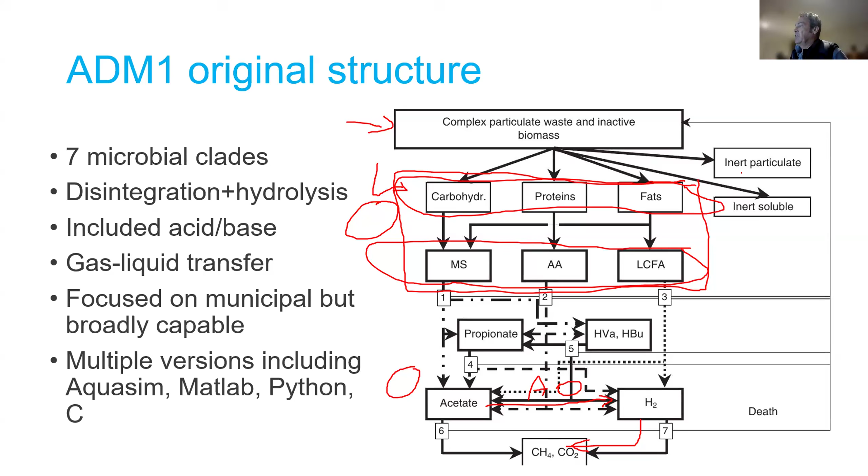Okay, so there's a couple of tricks with digester modeling in general. So you'll know, I'm just going to move this bar out of the way. Yep. So you've got pretty standard mass balances, dilute assumption in general in your soluble phase and your gas phase. So you've got your soluble components where you've got your standard mass balance equation with dilution and conversion.

The difference with activated sludge and anaerobic digestion in general is that you need a gas phase. So that gas phase is basically, it's a normally fixed volume. It can be variable volume. That's actually not really a problem either. So you can have an anaerobic sequencing batch reactor where your liquid phase is increasing, your gas phase is decreasing. That can be done, but under the standard implementation, you've got a fixed volume for your liquid phase and a fixed volume for your gas phase.

And that's a little bit tricky because you've got gas liquid transfer between the liquid phase and the gas phase. That can be bidirectional. So you can have gas going into liquid and liquid going into gas. And normally it will be from liquid to gas. So we'll have methane, CO2, and hydrogen transferring from the liquid to the gas phase. But some of the newer applications, for example, biomethanation, where we're injecting hydrogen into the gas phase, which then transfers to the liquid phase to make additional methane, that works perfectly well. We've still got the same equation, KLA times (C sat minus C), and it just works.

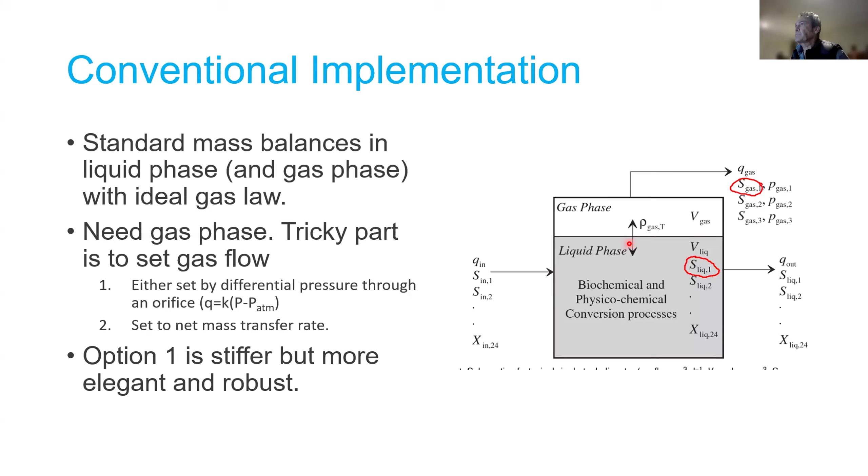So high rate anaerobic digesters treat mainly soluble feeds. They can be quite high strength, but the feed will mainly consist of sugars, soluble proteins, and maybe some soluble fats. So think things like brewery wastewater, beverage wastewater, ice cream manufacturing, something that is very low in solids but quite high strength. So you've got this granular sludge that forms.

Under this regime, you've got a very rapidly degradable feed that will produce VFAs very quickly if you let it. And you're really challenging your process stability rather than the process performance. So the hydrolysis doesn't even really happen. It often ferments before it even hits the digester.

Then you've got anaerobic membrane bioreactors. So that's simulated similar to aerobic MBRs, except we've got gas being recirced instead of aerobic scouring on the reactor. Anaerobic lagoons, just very long retention times with solids retention.

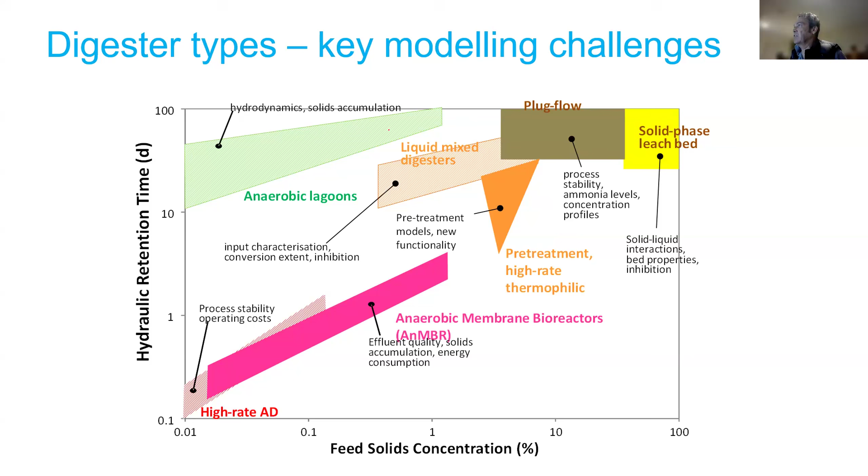And then we end up at the very high solids concentration with basically solid phase leach bed. That's where we've got a liquid flow through a leach bed, the liquid then being digested in a high rate anaerobic digester, and then the liquid flowing back through the leach bed. So that normally requires a 1D or 2D or even 3D model implementation. So there's modeling approaches to all of these, but of course we're mainly working with our municipal liquid phase digesters. So we're working in this region here, which may include pre-treatment.

Okay. So there's been a few key changes over the years, and particularly in the last 5 years it's been driven by municipal applications. So the changing needs in the digester space, as well as the changing modelling needs, as well as the change in technologies that have been applied to digester modelling.

The big change has been in plant-wide modelling, and Amir will talk about this a bit more as well. But plant-wide modelling was a big change because one of the things we really needed to do was to model P throughout the whole process, and that allowed things like nutrient recovery, implementation of technologies such as struvite and more recently vivianite to recover P. But to model P plant-wide, you need to also model iron and sulfur. To model iron and sulfur, you need a very good chemistry model, and that then led to the PCM1.

And in parallel, PCM1 didn't precursor this, but in parallel, there were some big updates to Sumo and BioWin to incorporate sulfur, phosphorus, iron chemistry, and the advanced iron chemistry needed to really model precipitation and a few other things. So this led to development of advanced chemistry models, which include a lot of non-ideal stuff like ion activity, ion pairing, its downstream impacts on gas-liquid transfer, full incorporation of temperature into that chemistry model, and a few other things.

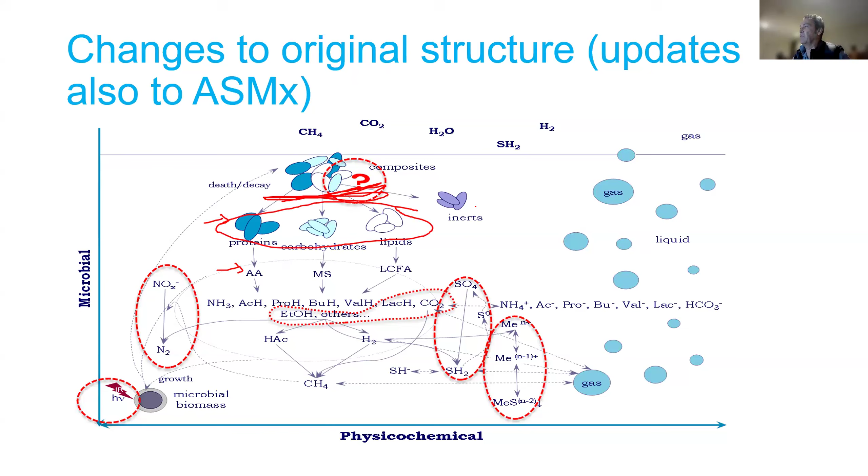Just showing you how it fits into a plant-wide context now. We can see we've got iron basically reducing in the primary clarifier. Sulfate will reduce as well. It'll probably already be reduced from the sewer.

You'll then go into your digester. Your iron phosphates will, because your iron will reduce again, release the phosphate. You'll also end up with poly P releasing, hydrolyzing over a longer time period. So that's actually a kinetic process. We've got iron reducing, sulfate reducing, sulfide binding with iron, phosphate forming calcium phosphate, and potentially iron phosphate if you've got a heap of iron around.

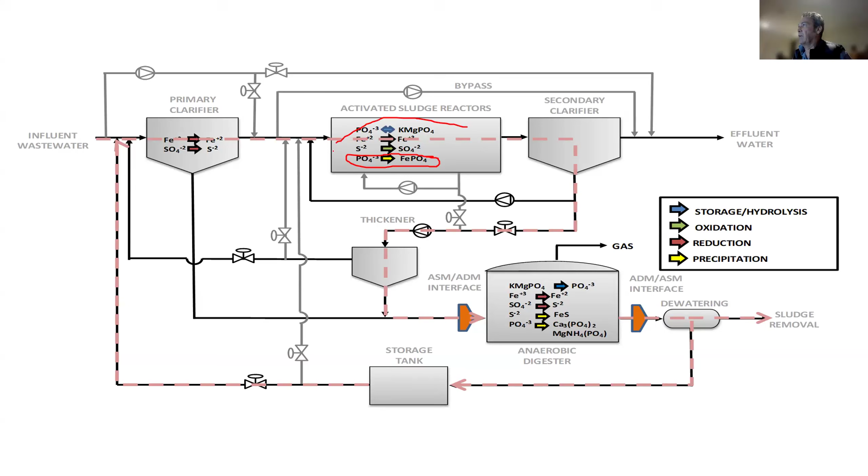And then you can do stuff like struvite precipitation or capture in the return stream to then try and recover phosphate. So inclusion of all these processes, and inclusion as well in the activated sludge modeling bit of these additional processes, is kind of essential to model P, which is essential to basically have a competent plant-wide model. So this is just showing this in a bit more detail. I'll probably skip over this because I am getting a little bit shorter on time and I want to show you some other stuff.

Okay, so this is the other area which has been difficult to communicate. I haven't ever published it, but I have talked about it a lot. And this is how practically I treat inputs now. As I said, I don't use the XC. Forget about that. I basically take everything and I separate WAS and primary into two different streams. And these then, I'm actually going to use my pointer.

These get separated in two streams, and each of these streams then gets split into carbohydrates, proteins, lipids, and inerts. So these are our four main components in any particulate stream. So they get separated into those four main components. Now, the protein content is set by the nitrogen content in the stream. And as I said, we've got one of these for WAS and one for primary.

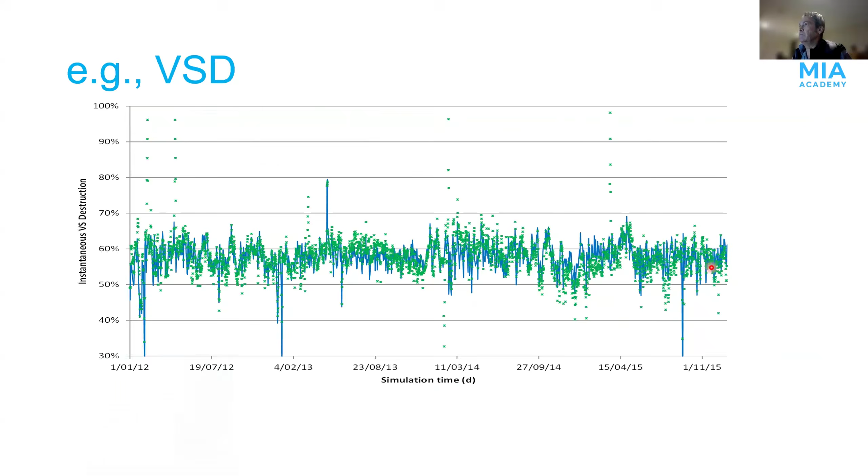Okay. So the last thing I just wanted to talk about is version creep. So we've been around for 25 odd years, so there's been a bit of version creep. Now, the most definitive versions are probably the MATLAB and/or C version. So we've got a MATLAB C core model, if you like, a model that hasn't been messed with, and then we've got the MATLAB C version with the iron, phosphorus, sulfur extensions and PCM1. So that's all available on Javi's GitHub.

There's a few Python versions, mostly very much stock. So they've just been made a stock version. The most commonly used one is probably PyADM1, which is also on GitHub, and there's a preprint article provided as well. The first version was actually Aquasim, but the Aquasim reference version still uses XC as a primary feed. There's all the versions that I've provided with my publications, also on GitHub. I don't have a GitHub site, but generally I'll publish a version with each publication.

But yeah, version creep and differences are a problem. And maybe that's something we have to do, is to just produce a definitive current version with the proper feed characterization and maybe a couple of reference examples. So that's a project for when I get a bit of time.

So finally, to finish off, most people who are in MIA, I'm guessing, want this as part of a plant-wide model, or want to model digesters. So sludge digesters, not all the other types of digesters I talked about. The BSM2 versions are generally consistent, both the complex version with iron, phosphorus, sulfur, and the non-complex version for simple digester modeling. I use the basic version for digester modeling unless you're trying to do plant-wide modeling. It's easier to interpret, a lot faster to use, etc. Sumo and BioWin implementations within the sludge world are broadly compatible with the BSM2 ADM1 with or without physicochemical extensions. Both Sumo and BioWin allow you to turn off the physicochemical extensions.

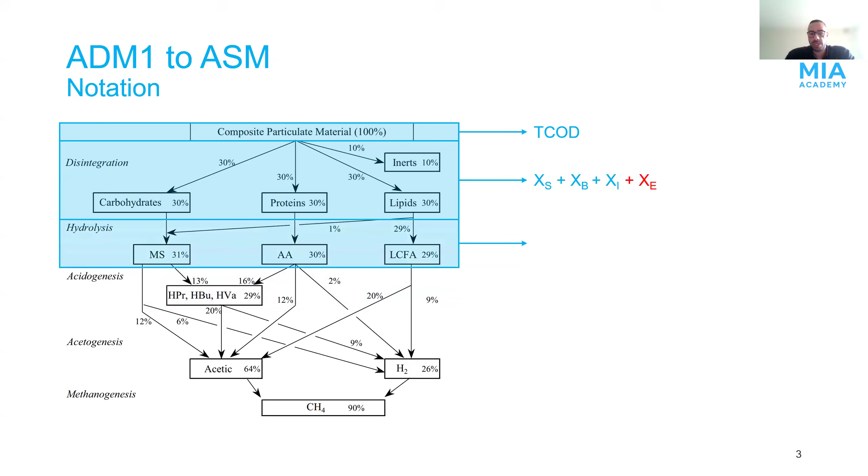They were both considered inert material, but now they have a distinction between XI, which is influent non-biodegradable material, and XE, which is endogenous products. And then hydrolysis here is basically everything hydrolyzing, which is only the biodegradable fraction being hydrolyzed, which becomes SS in some model notations, or SF as in the fermentable substrate in the notation of ASM1, and I think the rest of the ASMs.

And then here, in ASM notation, there's no differentiation between acidogenesis and acetogenesis. It's just combined into one process, which is fermentation. And this is where you start producing your VFAs and hydrogen. And in some models like BioWin, they don't just lump VFAs, they have propionate and acetate and also hydrogen production.

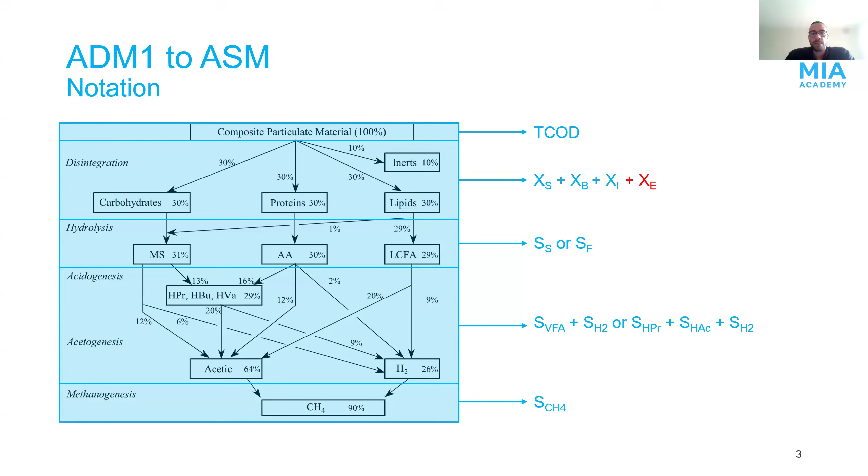And then your final process is basically producing methane, and it's just soluble here because you produce it as a dissolved gas, and then it gets stripped into the headspace. And this is what you end up with. You end up with a model where your total COD that goes to the digester is here. This disintegration is just basically fractionation.

So you have SI, which is the soluble non-biodegradable material. You have very little of that in your sludge feed, but since the model considers everything as completely mixed, you end up with some of it in the digester. You also have the XI, which is the inert non-biodegradable. It's just non-biodegradable COD, but that's the one that comes in the influent.

And XB is basically just your biomass, and you also have some of the biodegradable particulate material that is enmeshed into your biological floc. And with anaerobic decay of your biomass, if you look at the decay models, they have the death regeneration model. So whatever is intracellular material in your biomass becomes XS, and then you also have XE, which is your endogenous decay products. So this is about anywhere from 15 to 20% of your biomass, and the other fraction is just biodegradable material that will be utilized later in this cycle.

And then with hydrolysis, you end up with SF, which is a fermentable substrate, and then fermentation, you have VFAs, hydrogen, and also carbon dioxide being produced, and then you end up with methanogenesis. The explicit difference between ADM1 and ASMs is that we don't have the lipid, carbohydrate, and protein degraders. It's all carried out by ordinary heterotrophic organisms, which is not true, but it is how the model is structured.

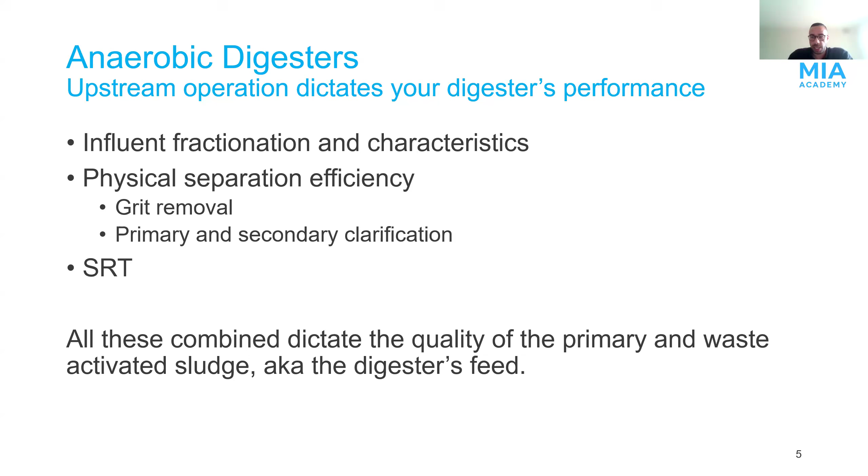Physical separation efficiency, your grit removal efficiency also impacts any downstream process and your digester, and also primary and secondary clarification. Also, the operational SRT impacts the digester's performance very much. Because all of these combined dictate the quality of your primary and waste activated sludge, aka your digester's feed.

All of this is going to be consumed anyway to produce more biomass. And then you have your VFAs that are also going to be consumed to produce biomass. Same thing with the biodegradable soluble substrate, and same thing with the colloidal substrate. So when these fractions are utilized, they end up producing more bacteria, which is your active biomass, which is XOHO, and you also, with decay, you end up accumulating XE.

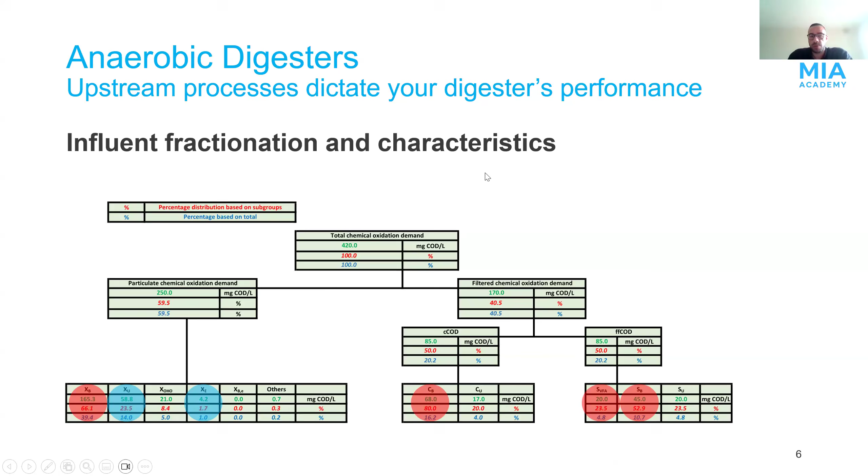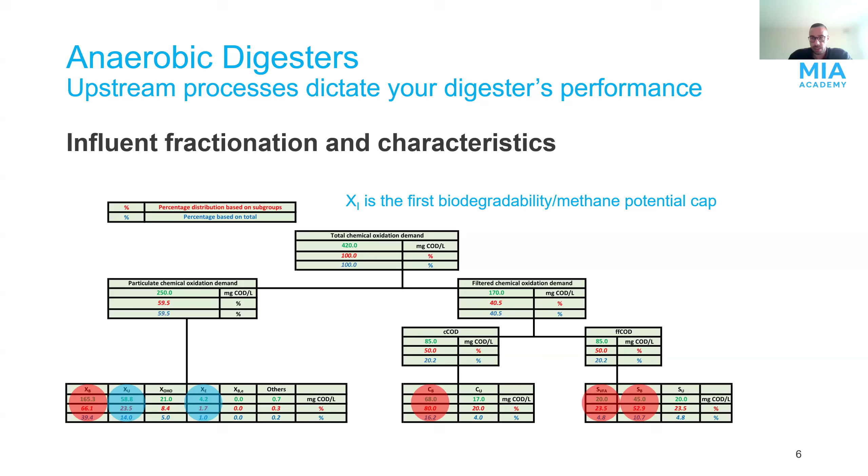So you end up with this fraction going from around 14% all the way up to 40%, depending on how your operation is. So the first thing that I call a biodegradability or a methane potential cap is XI. So if your sludge has a 20% non-biodegradable fraction, you cannot go beyond 80% biodegradability, basically. So that's your first limit when it comes to methane potential in your digester.

Second thing is primary clarification and secondary clarification. So primary clarifiers intercept COD before the aerobic tanks. So it captures all the solids, the good quality solids that can go into the digester before being oxidized and synthesized into biomass. The more you capture in the primary clarifier, the more methane potential is preserved, and it's basically the highest quality feedstock in the plant.

Also, grit removal has an impact on your digester because any grit that escapes could occupy active volume, and then you end up having short circuits, and your operational SRT decreases because you're occupying that space. So grit removal ensures healthy operation, although it's not modeled explicitly, but it's something that you want to consider when you're dealing with a plant-wide model.

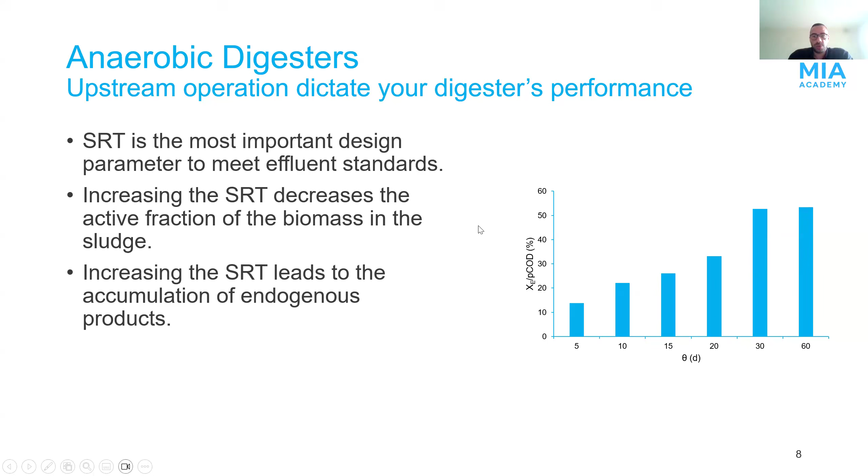So you're doing two things here. You're accumulating endogenous products, and you're reducing the active fraction of the biomass, which is most of your methane potential. So your second biodegradability or methane potential cap is XE. But there's a caveat with XE specifically, which is, are they actually inert? They are not. Endogenous products have been considered inert or non-biodegradable in most of the ASM notations before, and even in experimental studies, sometimes they have been considered non-biodegradable.

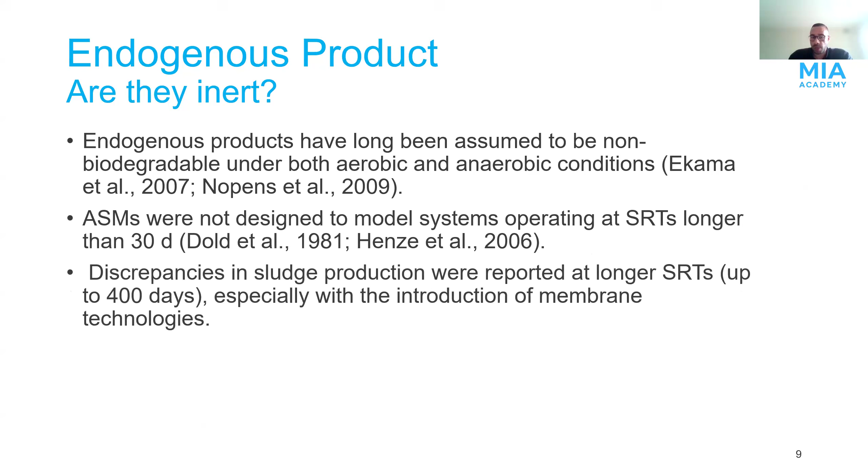But these models specifically were designed to model systems operating at SRTs no longer than 30 days. And with the introduction of membrane technologies and SRTs going all the way up to 400 days, they saw discrepancies in sludge production, which is the most important parameter you need to calibrate on when you're using any plant-wide model. They were always overestimating sludge production, which indicated there was a process that was missing. And that process was basically the degradation of endogenous products at longer SRTs.

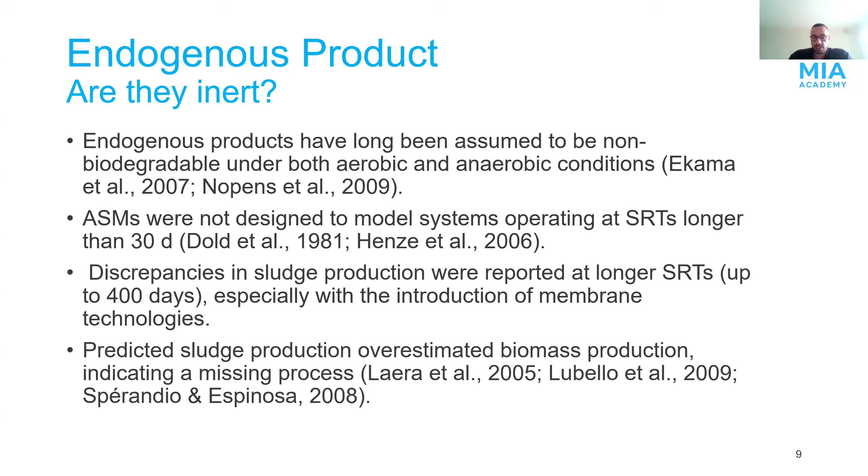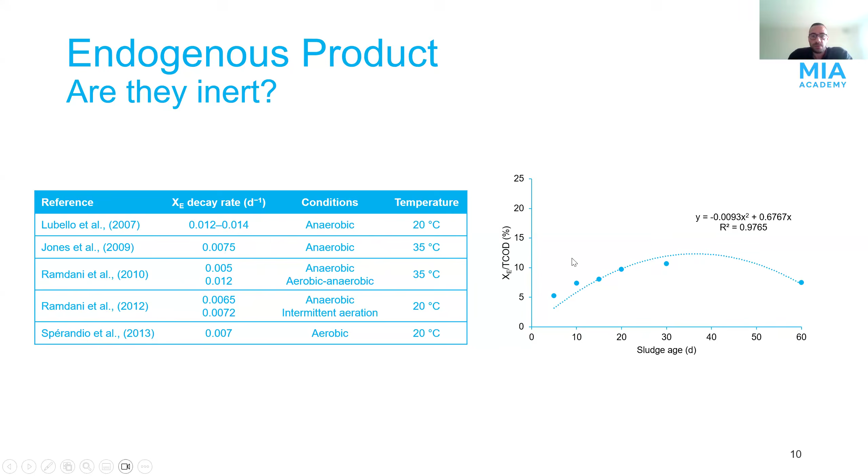The thing here is, it's kind of a summary. You look at XI and XE as the two caps on methane potential in conventional anaerobic digestion, because if your digester is operating at a longer SRT, you might see degradation of endogenous products in the digester also.

One thing is that reporting SRT is not a common practice in general. Especially in anaerobic digestion, you would not see any information about the upstream processes, especially SRT, although understanding upstream operation and influent characterization and fractionation is integral to making accurate predictions. You can actually figure it out on your own just by knowing the SRT.

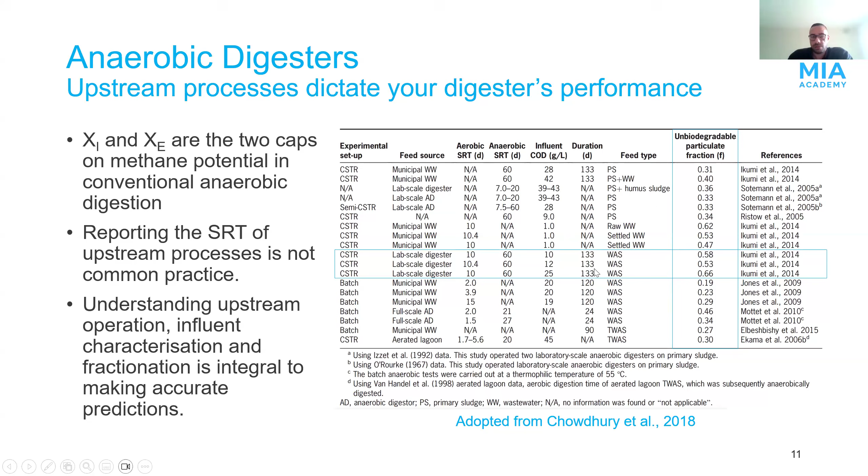You can already guess that the non-biodegradable fraction here is going to be high just because the SRT upstream is high. You have a 10-day aerobic SRT and an anaerobic SRT of 60 days, and you can figure out that it's going to be that high just by looking at these numbers. Although the unbiodegradable fraction here doesn't distinguish between the influent and XE, it's something you can guess by knowing the SRT of the system.

When it comes to good modeling practice of anaerobic digesters, AD mass balances are one of the easiest to close, because you just have a sludge feed, your biosolids coming out, and the gas coming out. The mass coming in is your flow multiplied by the total COD concentration. Same with your biosolids, flow multiplied by effluent COD, and the gas coming out is the difference between those multiplied by the stoichiometric conversion. The theoretical methane yield is 0.35 at STP, and you just do the temperature conversion. That's your mass balance.

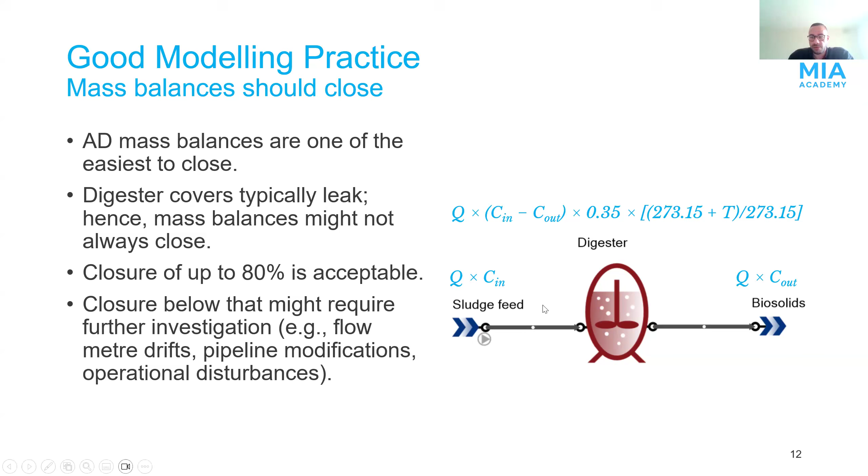But typically digester covers do leak, so the mass balance might not always close, but closure up to 80% is acceptable. I'm quoting Damien from a meeting we had 7 years ago. I don't know if this has changed, but closure below that might require further investigation. It could be flow meter drift, most of the time it is, pipeline modifications, or operational disturbances, but you need to check this before you start the modeling exercise.

The second thing is hydrolysis. There's a distinction between ASM and ADM1 here, because hydrolysis dictates the amount of volatile solids reduction or COD removal. Hydrolysis in ADM1 is first order, but hydrolysis in ASMs is surface limited, described by a Contois model, and also modulated by redox switches like the Monod equation. These are the three hydrolysis equations in ADM1: hydrolysis of carbohydrates, proteins, and lipids, each just a first order equation multiplied by a hydrolysis factor.

But in ASMs, it looks like this. You have the hydrolysis rate, but it's also dependent on the amount of ordinary heterotrophic organisms in the system. This is the Contois term. It's based on XB, your biodegradable particulate substrate, and it's dependent on OHOs, and this is your half saturation hydrolysis constant. Then the F redox here expands into this.

If you have an aerobic environment, this is the term that dictates what's happening; it's just a Monod term. In anoxic environments, you have these switches. If nitrite is the electron acceptor, this term works, and this inhibition function is what limits it when it comes to nitrate. So if nitrite exists, nitrate doesn't work, and the opposite.

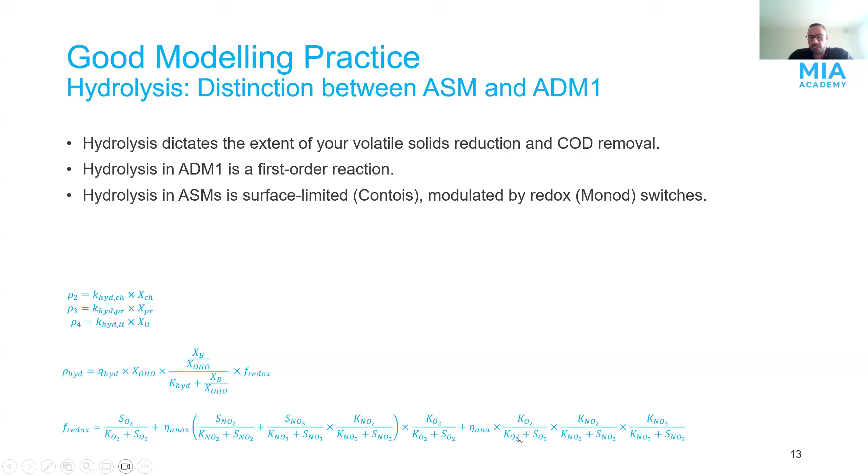All of this is also multiplied by a limiting function for oxygen, because if you have oxygen, you don't have an anoxic environment anymore. Same with anaerobic environments, but it's all just limiting factors because there's no explicit electron acceptor. It's mostly fermentative reactions where the electron donor is the electron acceptor. So once you have any of these, the environment is not anaerobic anymore. That's basically what it would look like in your model.

So you have rate of hydrolysis of slowly biodegradable substrate, rate of hydrolysis of substrate from biomass decay. So this is the differentiation between the biodegradable substrate that comes in the influent and whatever is produced from intracellular material. That's the distinction between those two. And then you have your reduction factor of anoxic hydrolysis, which is this term over here, and reduction factor of anaerobic hydrolysis, which is over here.

So hydrolysis is slower in anoxic and anaerobic environments typically, and it's the fastest in an aerobic environment, and it's reflected here in the model. There's no limiting function over here. It's just the Monod equation.

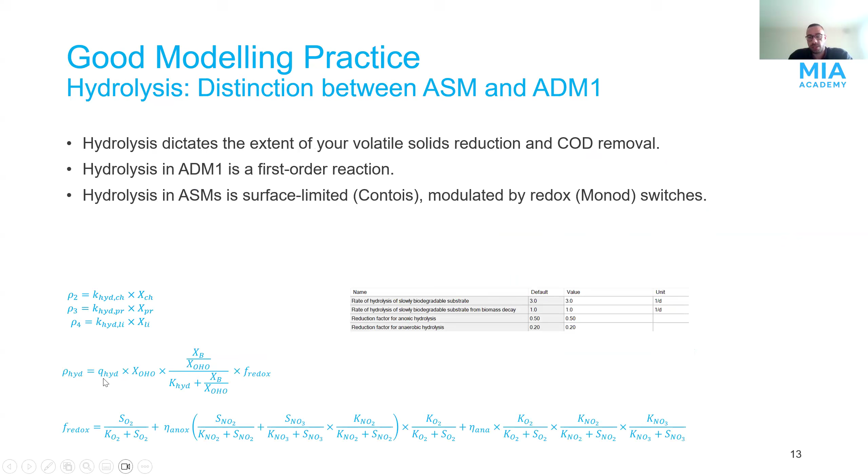And also on the topic of hydrolysis, you'll see that hydrolysis rate in ASMs need to be adjusted basically to accommodate upstream operations. So low SRTs, you have more biomass, and then with that biomass providing more biodegradability basically. So you end up with less endogenous products, more active biomass. So your hydrolysis rate might not need to be that high. High SRTs and lack of active biomass, then you might need to readjust your hydrolysis rate to accommodate for that. Because as you can see, in this term over here, you have less XOHO, so this term collapses and you need to compensate by increasing Q hydrolysis basically.

Primary sludge almost has negligible biomass. So if you're doing fermentation, you might need to increase the hydrolysis rate to accommodate for the lack of biomass in that term. Hydrolysis rates in ADM1 models like BSM2 need to be reduced to accommodate for the loss of biomass coupling. But the rate is fit substrate only, so you don't need to scale it.

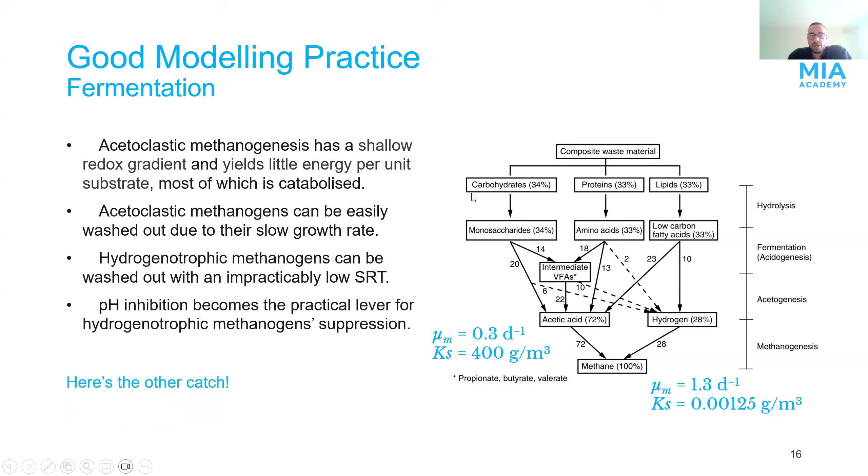So acetoclastic methanogens can be easily washed out. So if your SRT is fairly low, like 3 days, the minimum SRT for acetoclastic methanogens is 4 days. So you wash them out easily, but you cannot wash out the hydrogenotrophic methanogens. So what happens is that your practical lever here is pH inhibition. But there's another caveat with this, which is pH limits in any process simulator.

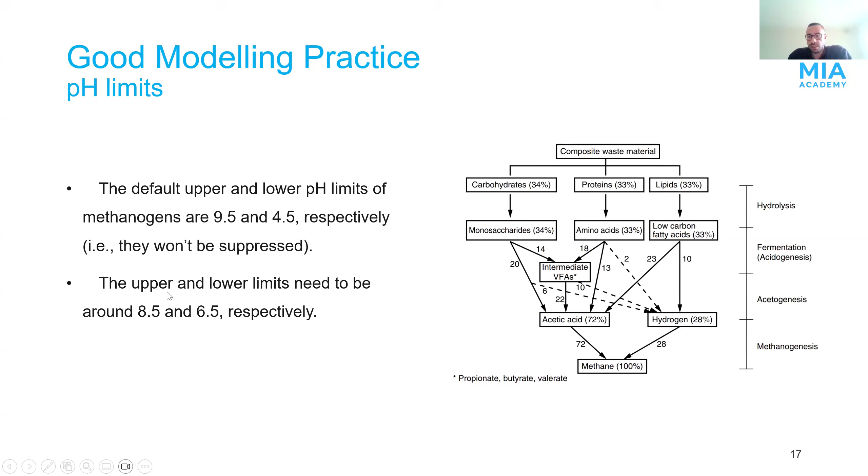So if you look at the pH limits of methanogens or any kind of microorganism in any activated sludge models or any process simulator, you'll see that it ranges from 9.5 to 4.5, which is far beyond what methanogens can tolerate, let alone any kind of bacteria. So they won't get suppressed at all. So upper and lower limits need to be adjusted with anaerobic digestion. Any pH below 6.5, the growth rate tends to be very low. And also beyond 8.5, you end up with free ammonia inhibition. So once you adjust these parameters, you can easily inhibit methanogens in the process.

Normally, you don't have to worry about this if you're not modeling fermentation, because then methanogenesis becomes the rate limiting step. But if you are, then you need to fix all of these. And basically, what if I do none of this? So this is just an exercise here. So you have the influent, and it's split into 2 primary clarifiers, and you have 2 fermenters, one operating at an HRT of 1.4 days and one operating at an HRT of 2.2 days.

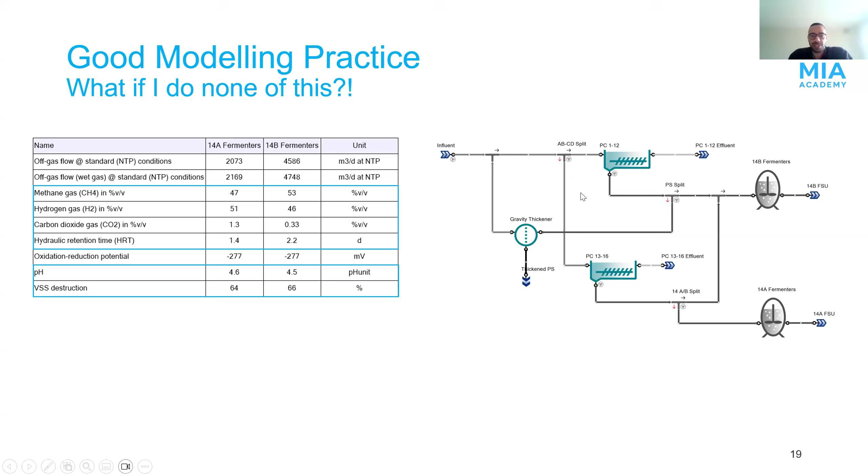If you've done that, then congratulations. First of all, you've rendered every pretreatment technology in the past century useless. And also you should be sitting next to your phone, waiting for a call from Stockholm, not listening to me, to be honest, at this point. This is basically what the world would look like if those default kinetics were true.

So the take-home message here is that defaults are a starting point, not an answer. Kinetics and stoichiometry are contextual, depending on your substrate and depending on what your goal is. Without proper process understanding, calibration becomes a very tedious trial and error process. And if you fix something and it works, the model also doesn't generalize well. And the burden of calibration is on the user. You can't just use the model as it is with its defaults; there has to be a calibration process regardless of what you're doing.